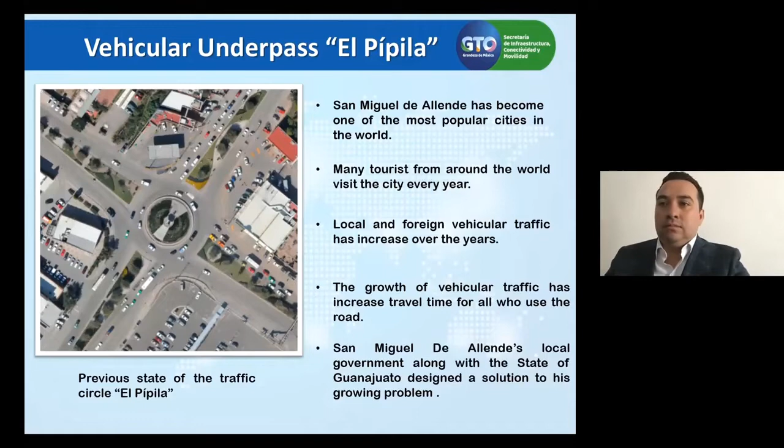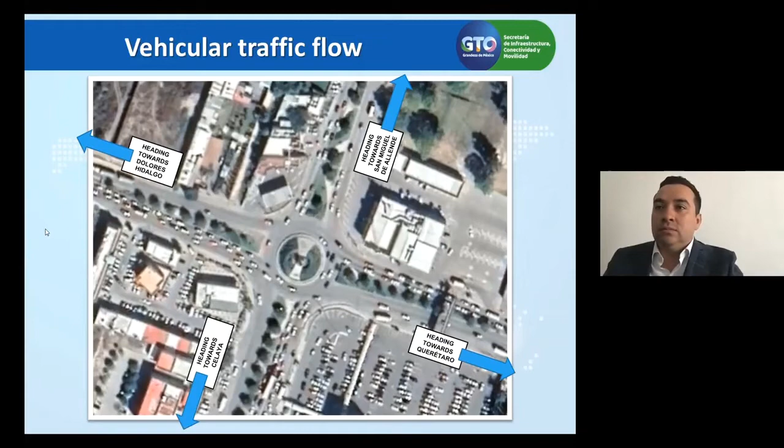Next, please, Paulo. The existing intersection through the Pipila roundabout allows vehicular control in 4 directions: to San Miguel de Allende, Celaya, Querétaro, and Dolores Hidalgo. Due to high vehicular flow in different directions, the roundabout doesn't provide the vehicular capacity and level of service with a free flow. Currently, the service level of the intersection is an F level, that is, an unstable flow with low vehicular speeds.

In 2019, at the intersection, there was a vehicle capacity of 53,615 vehicles. The most critical movements are the ones heading towards Querétaro and Dolores Hidalgo, traffic directions number 11 and number 15. Therefore, we have taken the decision to build a vehicular underpass in those directions with a straight free movement.

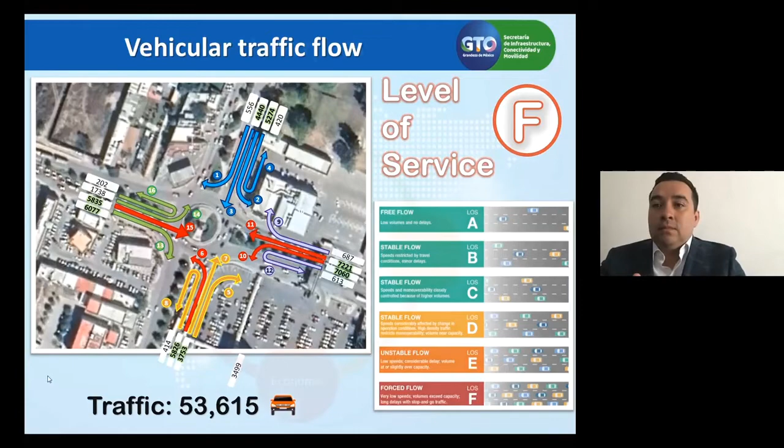But why a vehicular underpass? First of all, it's important to mention that the operation of a bridge must meet 4 conditions: to be safe, efficient, economic, and aesthetic. The vehicular underpass is safe and efficient because it reduces vehicular times and accidents by solving other vehicular traffic movements that will be managed by a traffic light intersection at the level of the street. It's economic because the cost-benefit analysis shows that a vehicular underpass is around 25% cheaper than building a high bridge, a vehicular overpass. This analysis was justified to the Secretary of the Treasury.

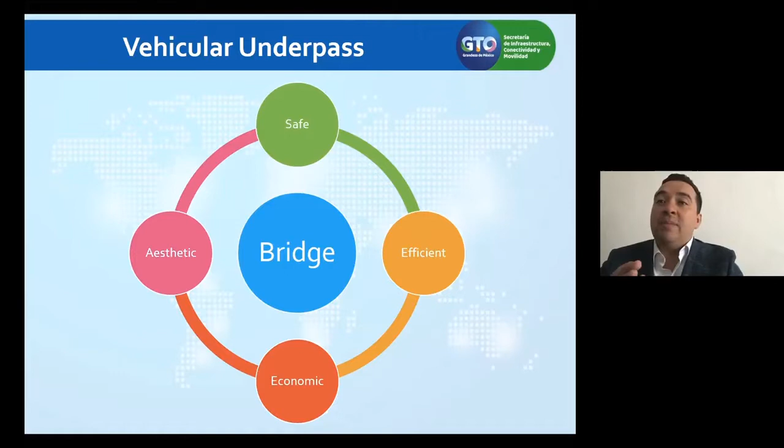Finally, the bridge was designed to be aesthetic, trying to stand out the urban image and to keep the same architectonic language and harmony of this site. The next slide shows some rendered perspectives of what the intersection and vehicular underpass will look like in the future.

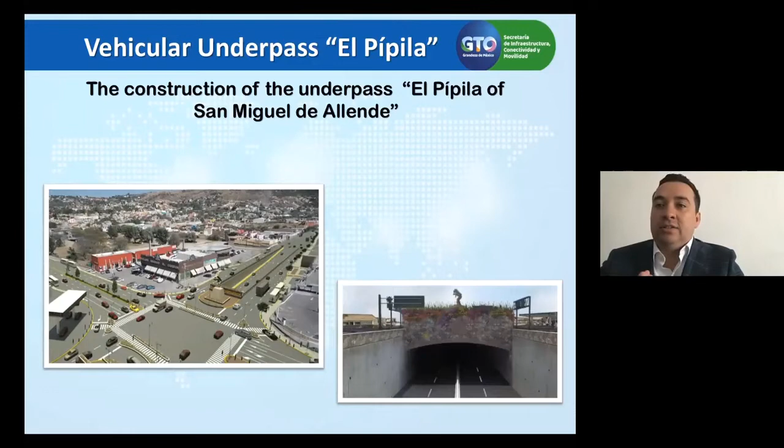Okay, now we'll talk about some project features. Construction of a 524.8 meters long vehicular underpass. The vehicular underpass consists of 4 lanes, 2 per direction, with a total road width of 13.6 meters, including a pluvial pumping station. As mentioned, the vehicular underpass includes traffic lights, but also includes hydrosanitary and electrical services.

This model that you can see was made using building information modeling.

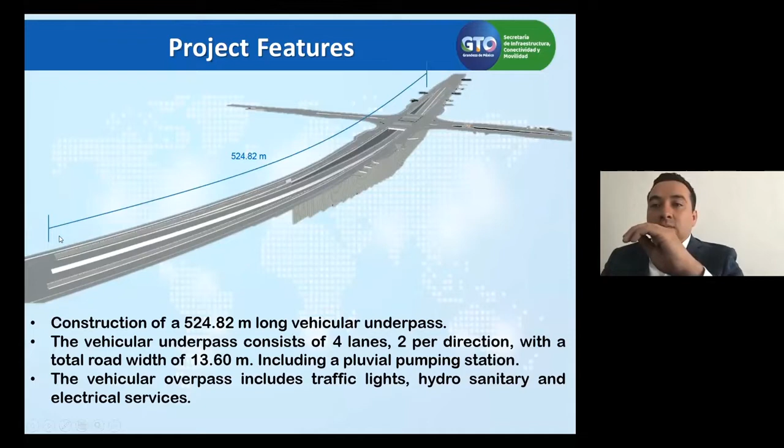Now, a brief explanation of the project schedule. The activities are shown by months until November 2020, which will be the end of construction. The following items are included: roads, pavement, retaining walls, bridge, signaling, traffic lights, urban image, environmental actions, hydraulic pipes, sanitary drainage, pumping station, street lighting, relocation of electrical infrastructure, etc.

The activities carried out according to the program are shown in green, and the total project activities in blue. Today, an accumulated real physical advance of 46.8% and a program advance of 42.8% are reported.

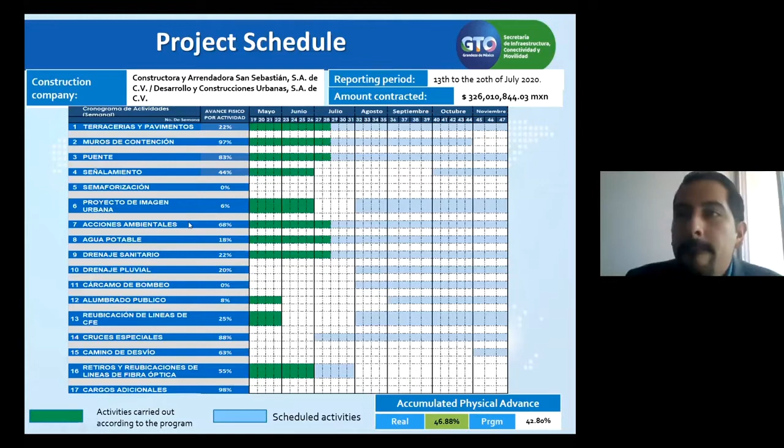Now we're going to talk about activities in process. On this slide are represented axis 50 and axis 60, both in the direction from Dolores Hidalgo to Querétaro, from left to right. As we can see, in the middle is where the beams of the bridge are located.

The underpass uses a pile wall system for a total of 740 piles. At this moment, we have done 99% of the piles, leaving a total of 4 remaining. The length of the piles ranges from 8.3 to 28 meters.

That's because of the properties of the soil, the cantilever of the pile wall system itself, and the depth of the pumping station.

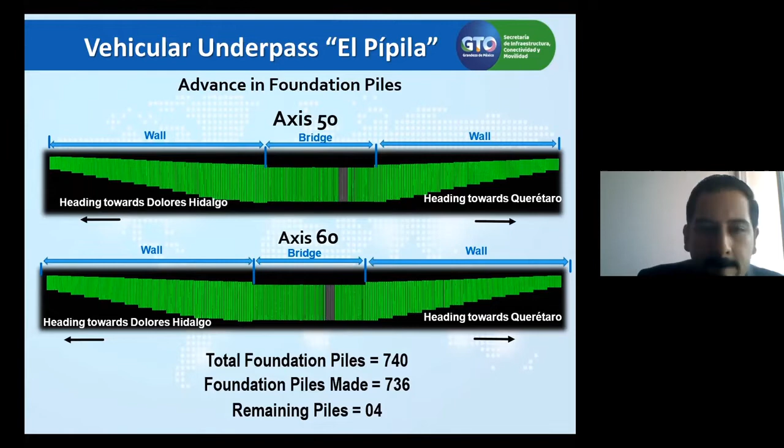Well, here we are going to see the advance in foundation piles. First of all, we have a brief video of the drilling of the foundation piles.

In the following photos, we can see the process of the crane lifting the reinforcing steel to introduce into the drilling hole. Once the reinforcing steel is in place, the concrete is cast into the piles.

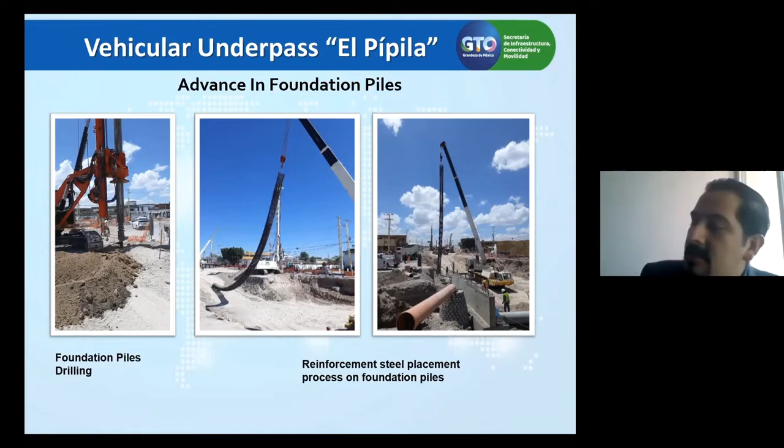The underpass project has a total of 39 box beams and a special beam, which I'll talk about on the next slide. That beam is shown in pink. We have mounted a total of 21 beams, so there are 18 beams remaining.

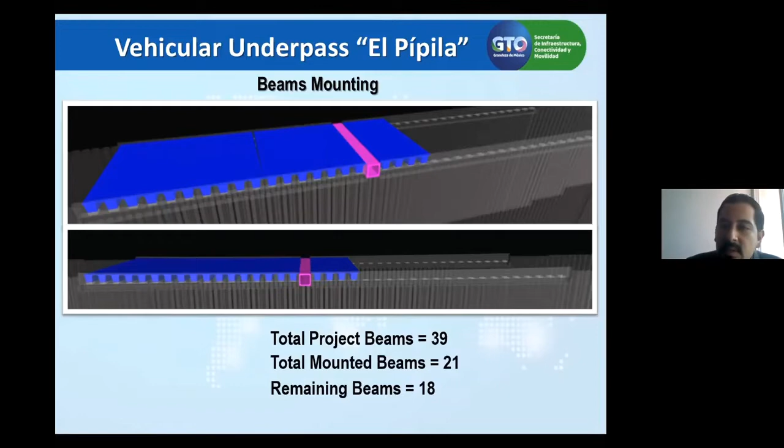So the special beam is shown in the upper left photo. It is designed to flow the rainwater that comes from Celaya access, as well as from the side of exit to Querétaro and the entry of Dolores Hidalgo. The slab above the beam is designed to receive and resist live and dead loads without contact with the special beam. The beam connects to the rain drain boxes at the ends.

The top right photo shows the beam mounting. The bottom left photo shows a top view of the beams already in place. And in the lower right corner, we have a short video of the mounting process.

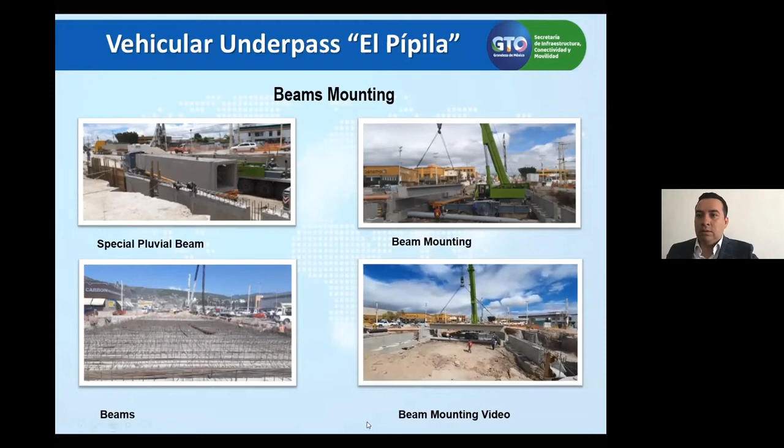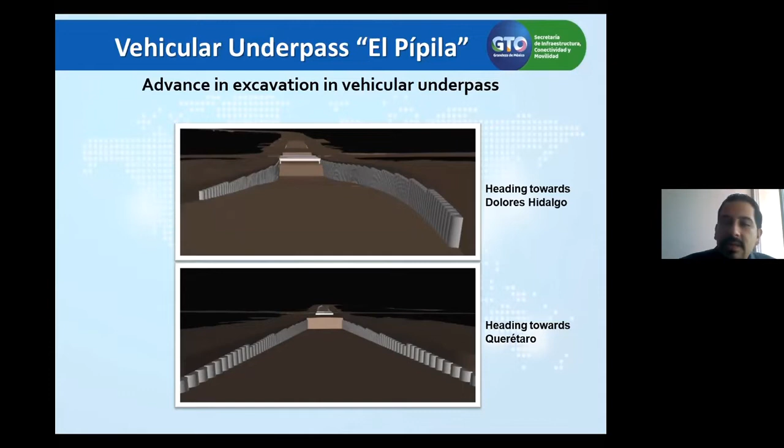As my partner says, in the vehicular underpass we are using building information modeling for job monitoring. Here we can see how the software shows the progress of the excavation. The top photo is heading towards Dolores Hidalgo, and the bottom photo is heading towards Querétaro.

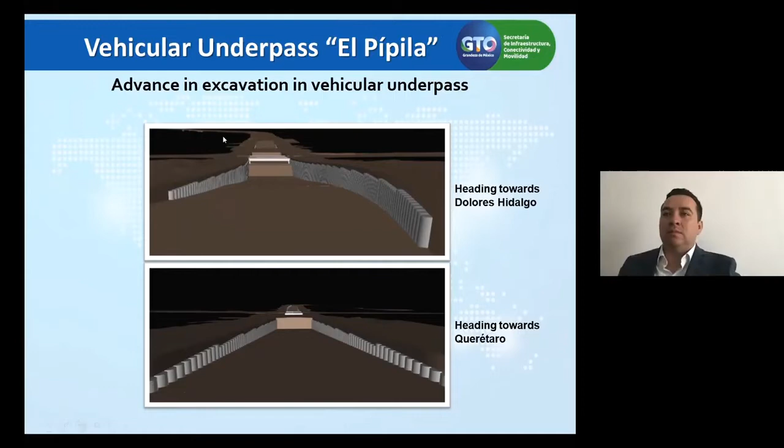In this slide, we can see the actual process and how the excavation really looks. Previously, we talked about drilling and casting concrete in piles. Once the concrete has reached the required strength, excavation proceeds, and as a result the wall of piles can be seen. In these photos, we can see the real progress of the excavation. The first photo was taken heading towards Dolores Hidalgo, and the second is heading towards Querétaro.

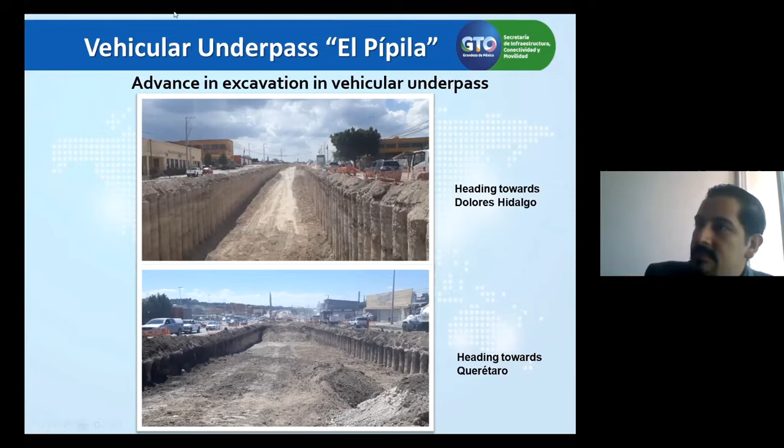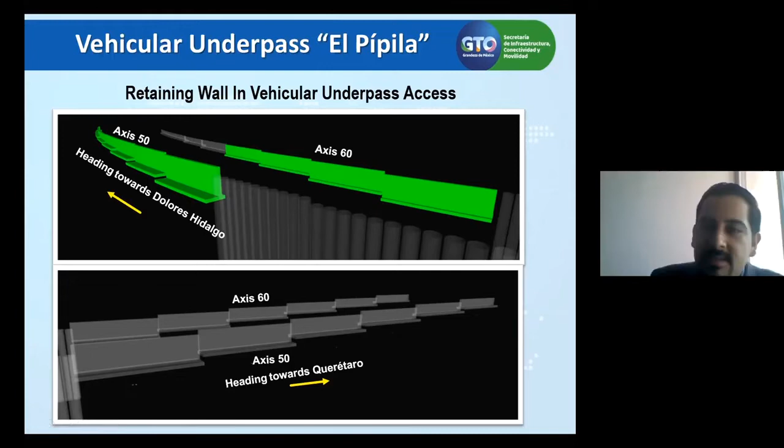On the east side, heading towards Querétaro, construction of the retaining walls has not yet started. These images are from the construction process of the retaining walls. First, the trench is dug, a concrete layer is placed, and the footing and wall reinforcement steel is placed and cast. At the end, the back of the wall is filled.

This view is from the west side, heading toward Dolores Hidalgo.

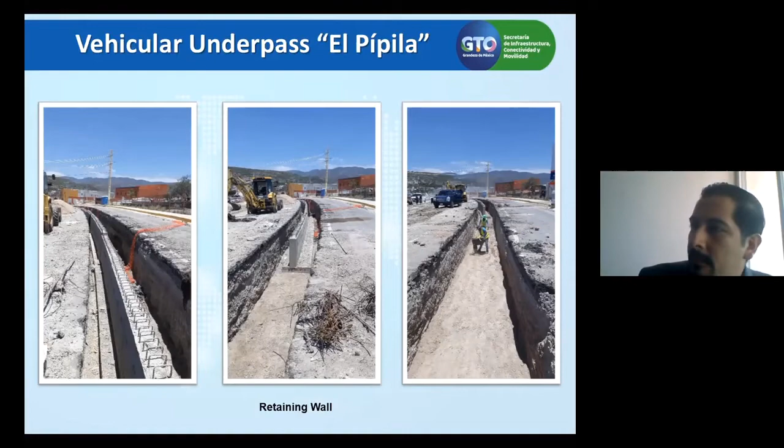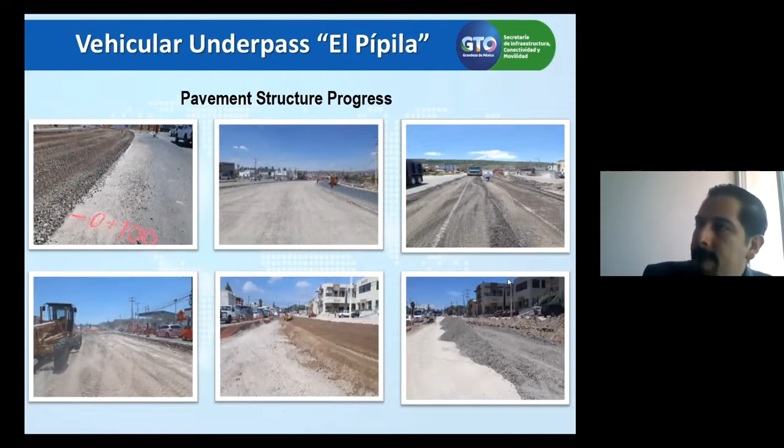On this part of the presentation, we are going to talk about subsequent works.

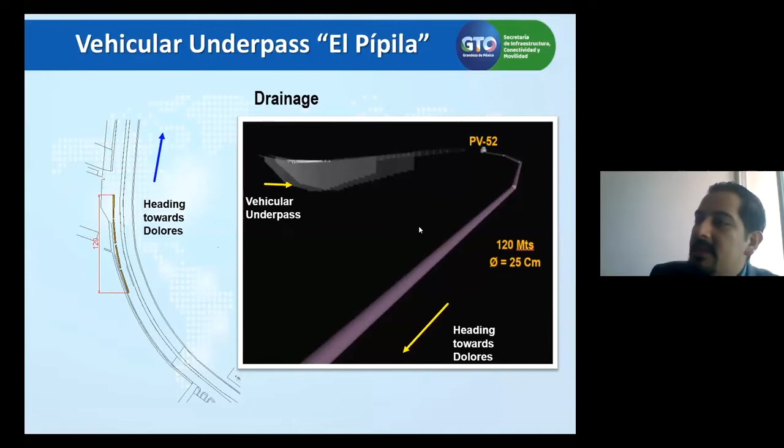According to the project schedule, 120 meters of 10-inch diameter drainage pipe will be built. As we can see, there are 120 meters here we have, and this is how it looks in the building information model.

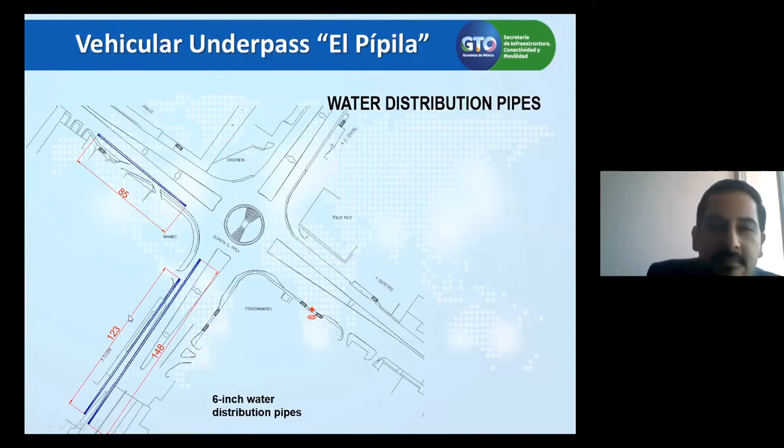Also, we're going to build 6-inch water distribution pipes. The total length is about 350 meters.

As Jose Juan says, the underpass had a pluvial pumping station. The pump station has a function of pumping rainwater from the vehicle's underpass to the surface. There are 3 project pumps, 2 running 24 hours, and 1 is an emergency pump in case one stops working.

The station will have electronic sensors that detect the water level and start the pumps. The 3rd pump can also start in the event of an extraordinary flood, and all 3 pumps will work together.

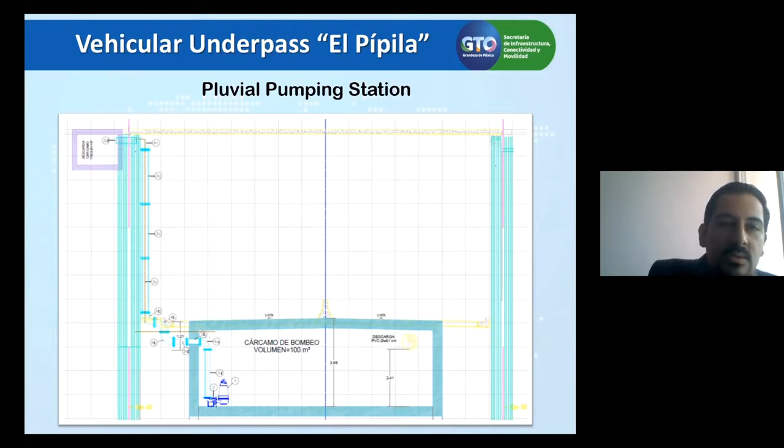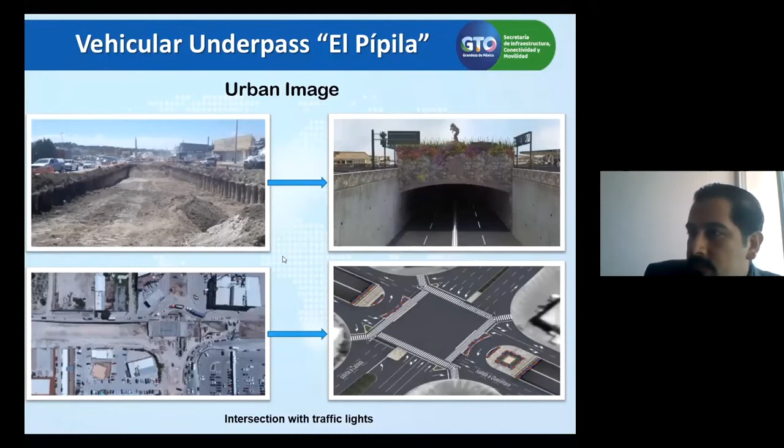These are the final images of how the vehicular underpass will look like. In the first image, we can see the size and the axis from Querétaro, where you can see the location of the monument, the signs, and the pedestrian crossing.

The second image shows one of the greatest contributions of the project. According to the mobility law of the state of Guanajuato, priority will be given to the pedestrian crossing with the help of the installation of programmed traffic lights, making the crossing safe and at ground level.

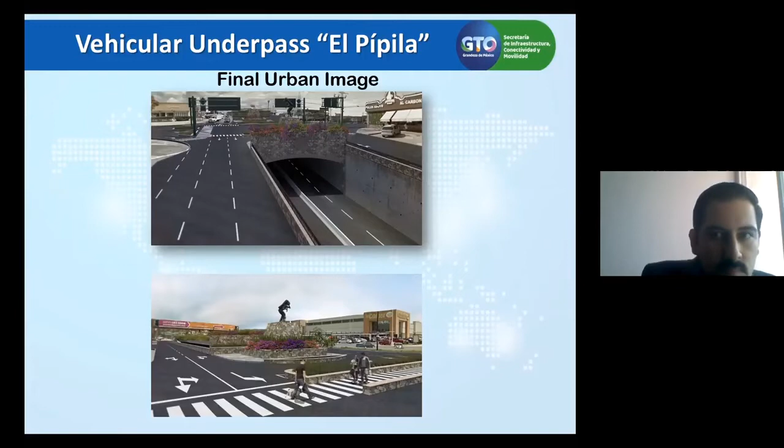So this is how the presentation ends. And thank you everyone for your attention.